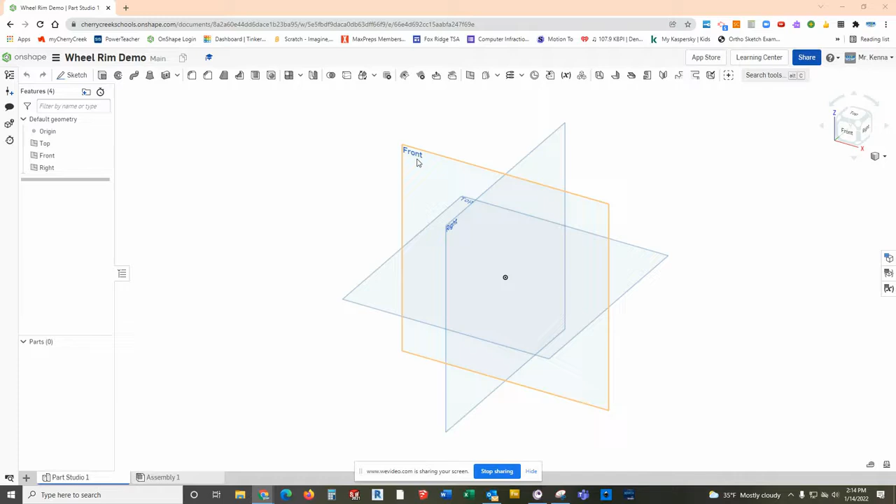So what we're going to do is start by creating a revolve so that the face of the rim faces the front view. In order to do that, we're going to draw it from the side.

I'm going to pick the right side plane, spin it over to the right side, and start a sketch. One of the first things I'm going to do is back up some, using control and the scroll mouse wheel to pan this down a little bit, because I am going to start from the origin, kind of working my way up.

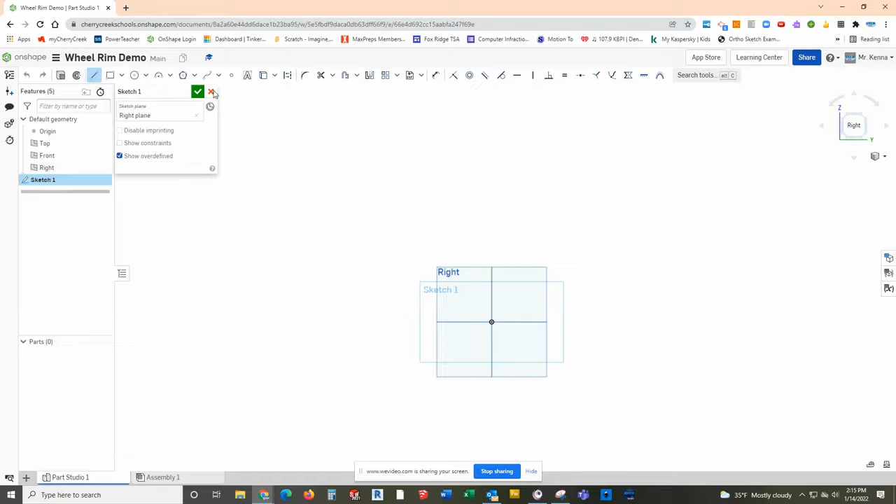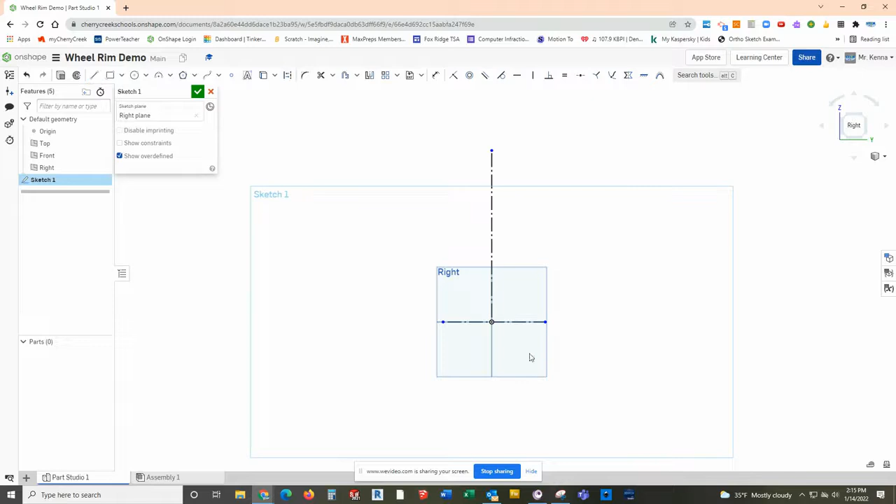The first thing I'm going to do is create two construction lines. I'll get my line tool and turn them to construction lines. The first one goes from the origin straight up, about 200 millimeters is plenty. The other one goes from the origin to the left, staying horizontal - you can see the icon telling me I'm doing that - drawing straight across through the origin, which should create a fully defined construction line. The size doesn't really matter.

You want to make sure you have plenty of space. Now we're going to draw half of the car rim shape, because what we'll end up with looks like a weird shaped Y. So we're going to draw the left half.

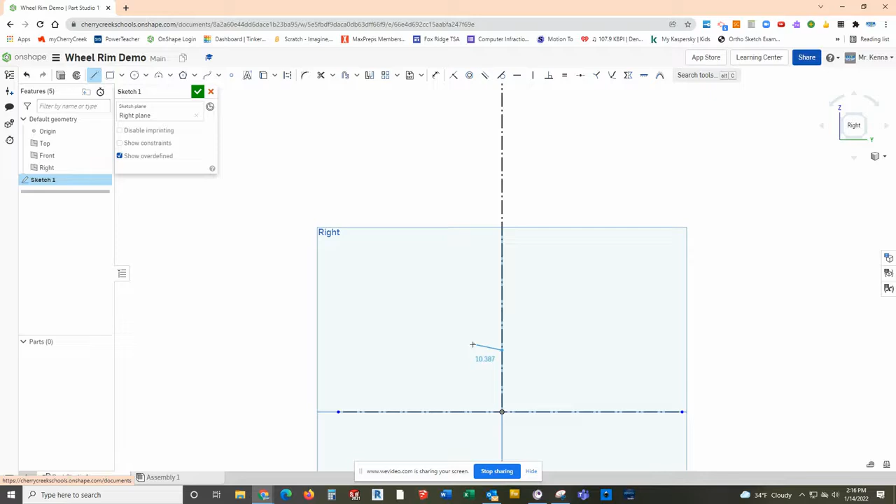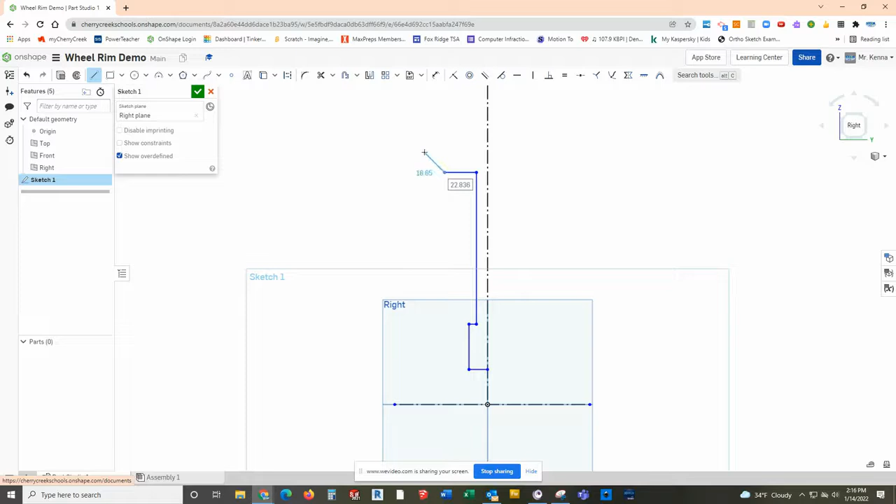I'm going to get my line tool, regular line tools, not construction, and start on the midline, the vertical center line. Somewhere in here-ish, draw straight out, straight up, back in slightly, straight up for a long period of time. I'm going to zoom out a little bit and pan up, draw it nice and long, then draw straight out, up at an angle, over.

If it adds the perpendicular, that's the one that looks like an upside down T with a box in it - that's fine. Back, and again if we add perpendicular, that's fine. I don't know about the vertical to that, so I'm going to stop a little early. Then I'll draw back to the center line, a horizontal line. So those are my lines to start with.

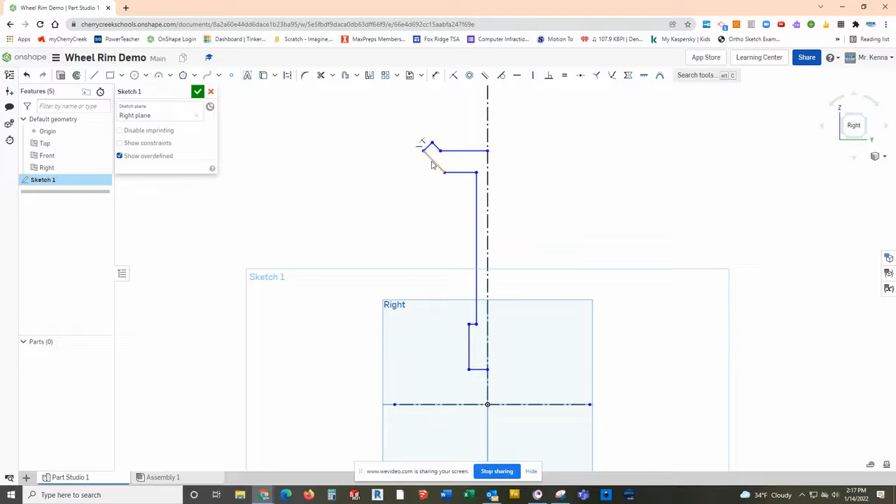I'm going to go ahead and add a relationship real quick. I'll grab this line and this line, and I want to make them parallel - not the equals one, make sure it's parallel so those stay parallel. If you didn't have the perpendiculars here, that should fix that.

These are both horizontal, so they're automatically parallel - all of that is fine. So I'm going to start adding some dimensions, starting from the bottom up. My first dimension is from here to the bottom - this is that open part of the wheel where the hub would come through. It's 30 millimeters. This is also 30.

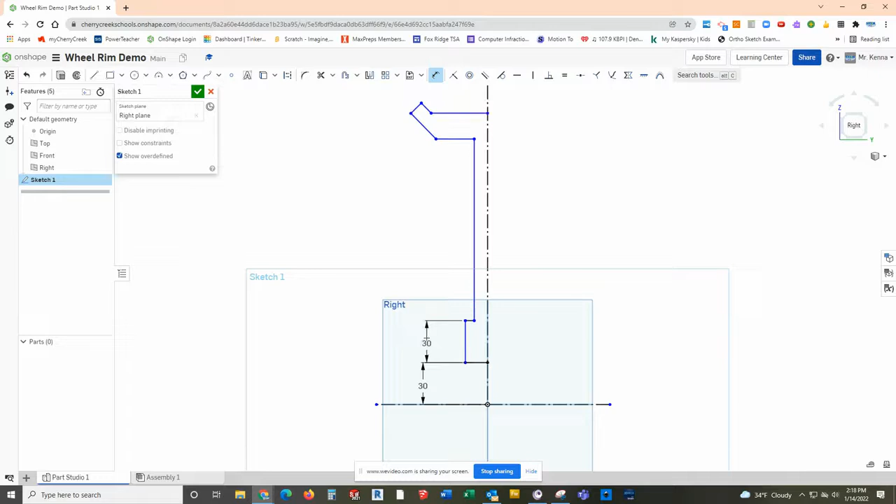We're going to go back 5 millimeters. This line is 100 millimeters. This line here is 20.

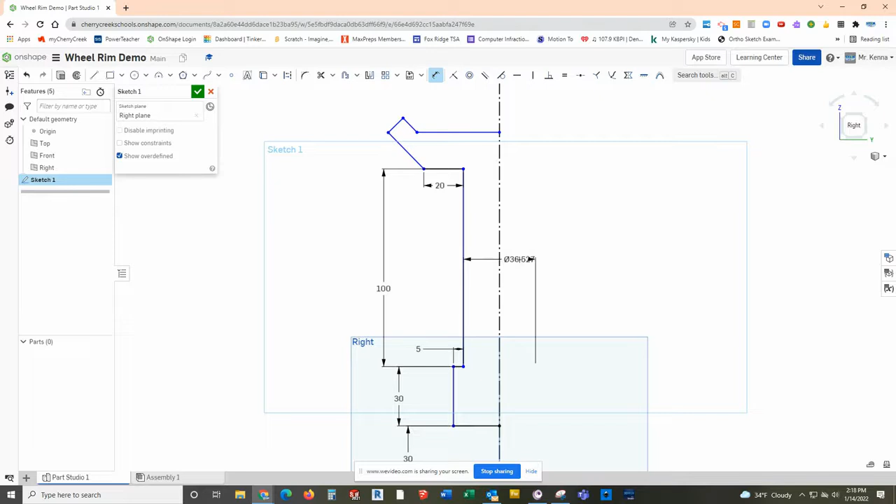And cool little trick - from this line, if I click then my center construction line, I can either tell it the distance from the construction line, or since I know I'm going to mirror that line (that's why this line is here, because I'm going to create a mirror), if I drag to the other side it'll tell me the total distance, which is what I'm going to use - this is 10 millimeters.

From here to here is 10 millimeters. From here to there, it's also 10 millimeters.

Now from this line to this line - oh sorry, I actually found out I have to do that backwards. So I want to keep this angle, and I actually know I want a 120-degree angle. So I'm going to click those two lines, because right now they're not parallel, and set them at 120.

Now I should be able to change this to 10, and it'll kind of maintain what we got going on. The last dimension is what I'm going to add that will end up disappearing, but that's okay, this line here at 25. But currently I'm all fully defined.

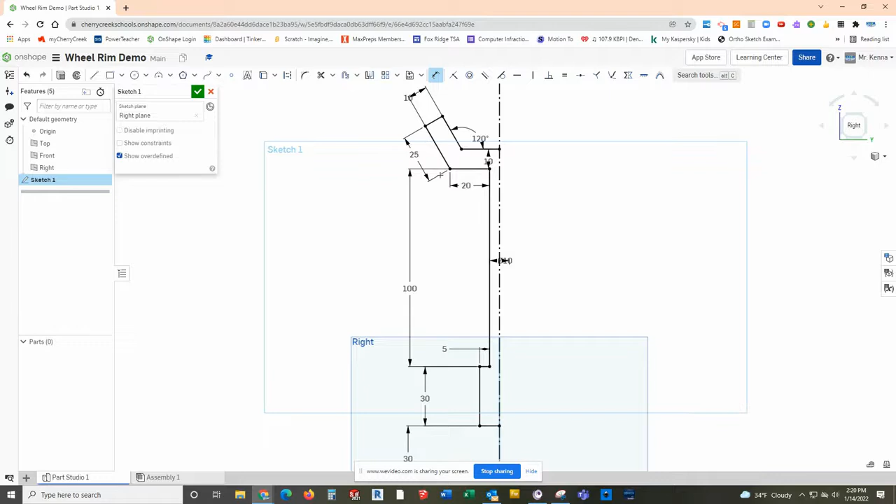Now, if you were to actually look at a rim from this distance, you would notice that this is not a square edge up here where it meets the tire. It's actually a partial circle, okay? So we are going to put that circle in and do a little splitting and trimming. You've never seen the splitting tool before, so that'll be new.

So I'm going to get a center point circle. I'm going to go to the middle of this line. I'm going to get a midpoint relationship. I'm going to bring this out, and I am going to dimension it at 15.

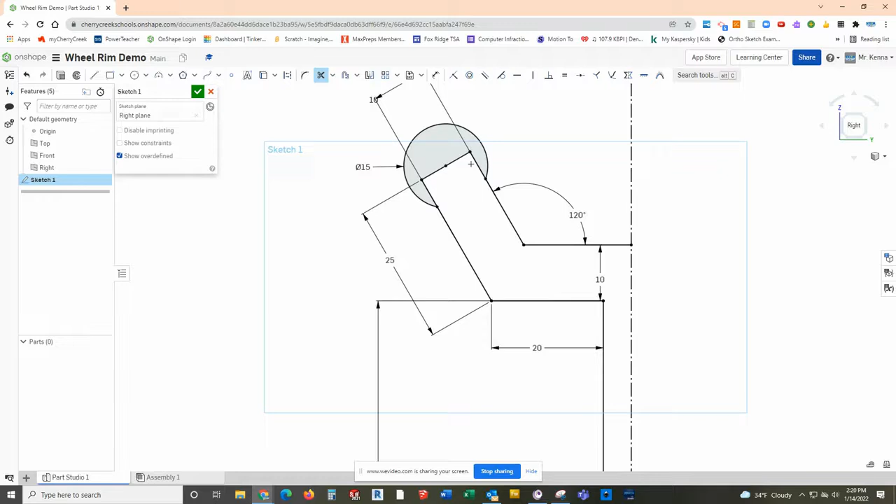Next set of steps, the order is really, really important. So the first tool I'm going to use is trim, and I am going to get rid of part of the circle. Now, if you notice, the top of this rectangular angled piece right here actually helps me locate my circle. So while I don't want these to be regular lines, I also don't want to get rid of them. I just want to turn them into something that doesn't interrupt my sketch really.

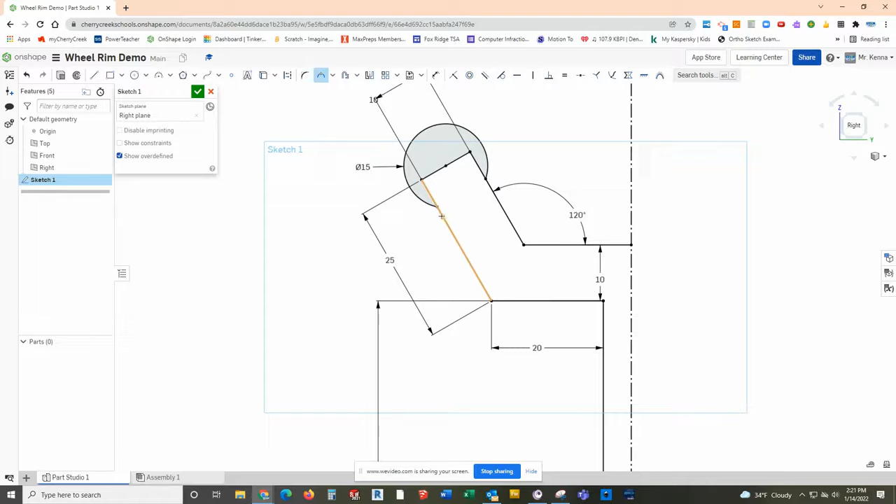So here's what I'm going to do. I'm going to actually get a different tool out that's called split. And what happens is if I go up this line and I go right to where this intersection happens and I click, it actually split my line into two lines. Got the lower line now and the upper line.

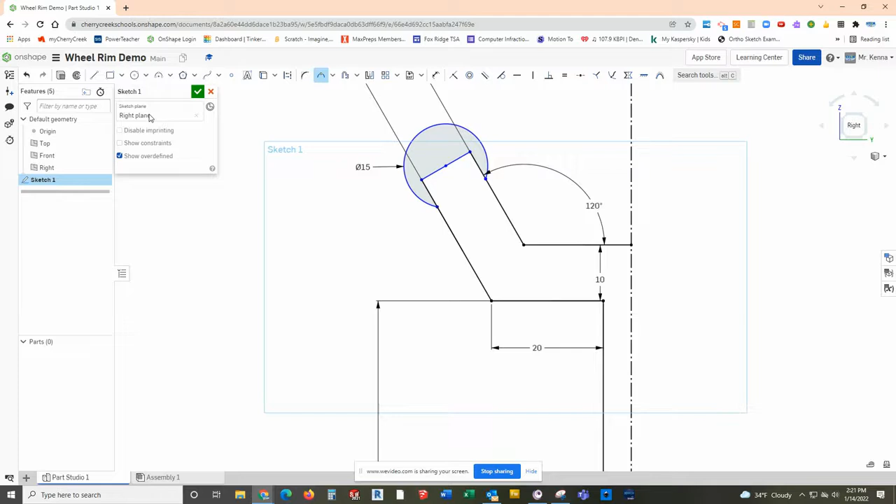I'm going to do the same thing on the other side. I'm going to come up this line to where it starts. I'm going to click to split those, and that's great. So if I get rid of this tool, you'll see I can now select this as a line or that as a line. But really what I want to select is these three lines.

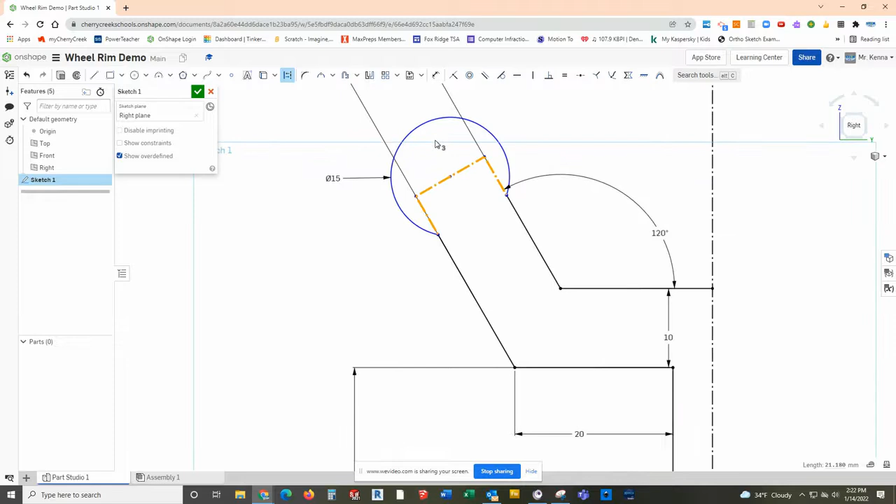So the little segment I made there, the segment I made there, and the part that connects the top. And instead of trimming them out or deleting them, I'm going to just make them construction lines. Okay, now they're still there, and they can be used for measurements and stuff. So I know it did go from being fully defined to being underdefined. The only thing I need to add is a measurement of this line right here, so everybody knows kind of where that starts and stops.

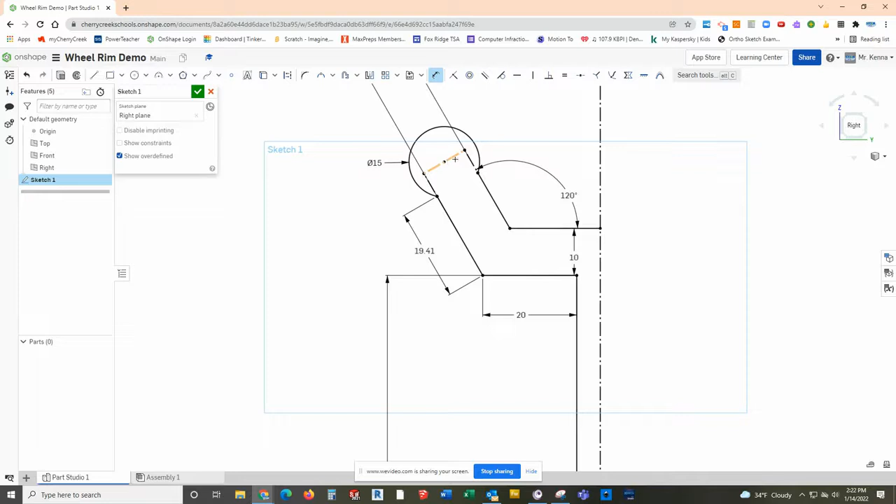You don't need to change it. It'll say 19.4 or something or other. And that's fine. We already know that from this endpoint to where this line happens in the middle, that's 20. I should have everything fully defined.

When you're going to use a mirror in a sketch, you really want to define everything that is going to be copied. That way it's fully defined when it goes to the other side. So here's a cool little trick. I think when we've seen the mirror tool before in this case, we've selected all the things, then clicked the mirror tool. One of the other ways you can do it is actually the exact reverse.

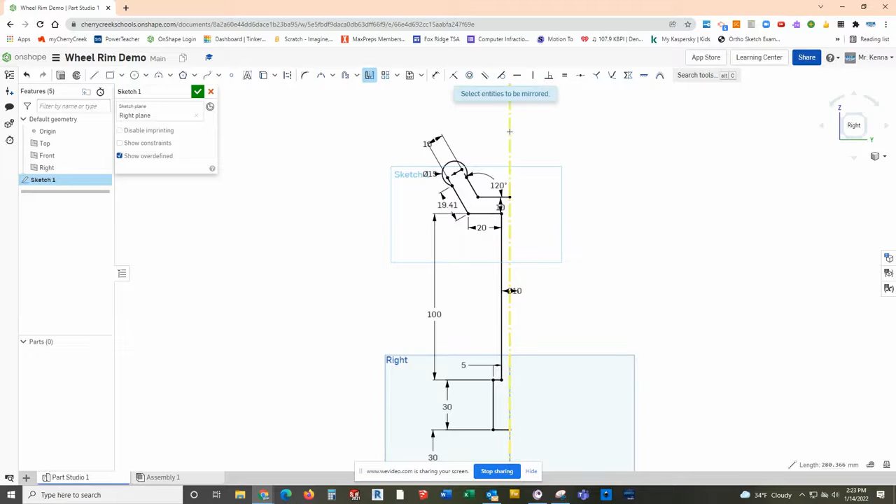So I can click the mirror tool. It'll tell me to pick a mirror line, and I'm going to grab this vertical center line right here. And now I can click on the stuff to mirror, so I can pick the exact things I need to mirror.

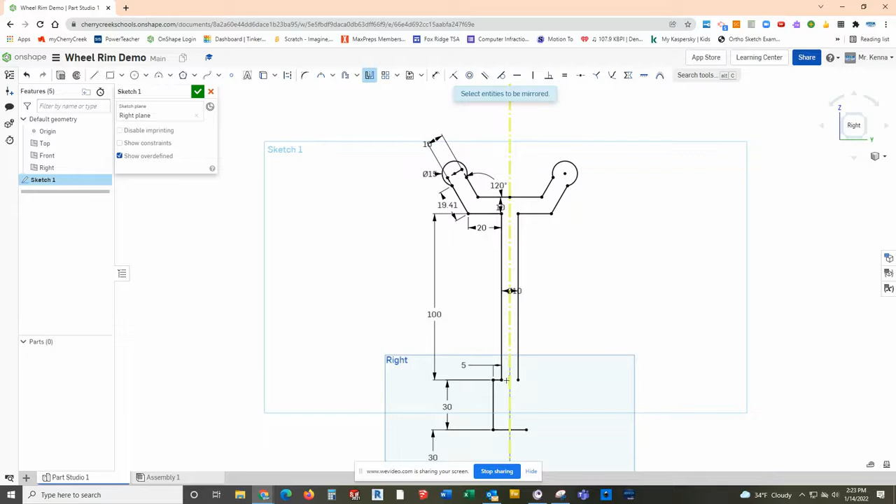So I don't need actually those construction lines there. I can mirror that, so all the lines at the top, this one here, and I'm actually only going to mirror this line right down here, okay? Because we're not going to have this hub stick out towards the outside. I'm going to go ahead and finish my mirror tool there.

The other tool that's under, so we've used trim, we've used split, now we're going to use extend. So if I click extend, I'm going to click this line, and I'm going to extend it all the way down to this line. Then what I'm going to do is I'm going to switch to trim, and I'm going to get rid of the excess.

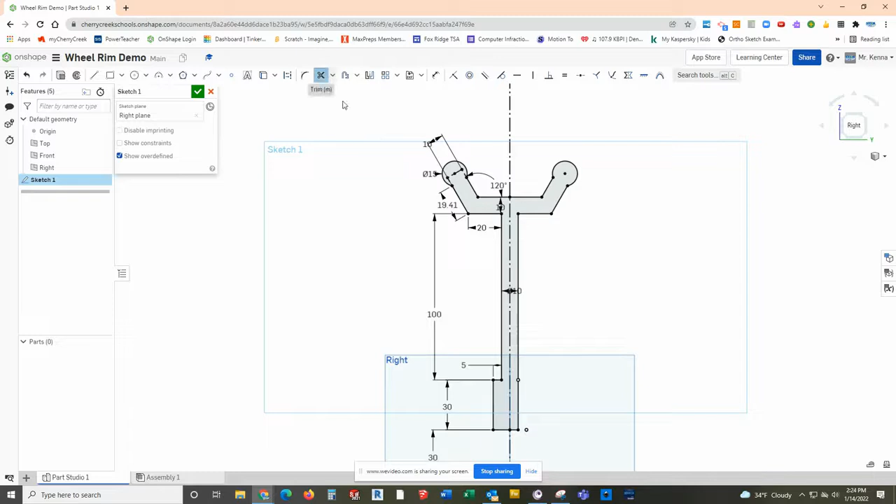Now what it seems to do is it leaves these little points, and you can see that they're hollow points. So if I click on it and I push delete, they should go away. If they don't, that's okay too. But right now I have a fully defined sketch, and this is the basis of my rim.

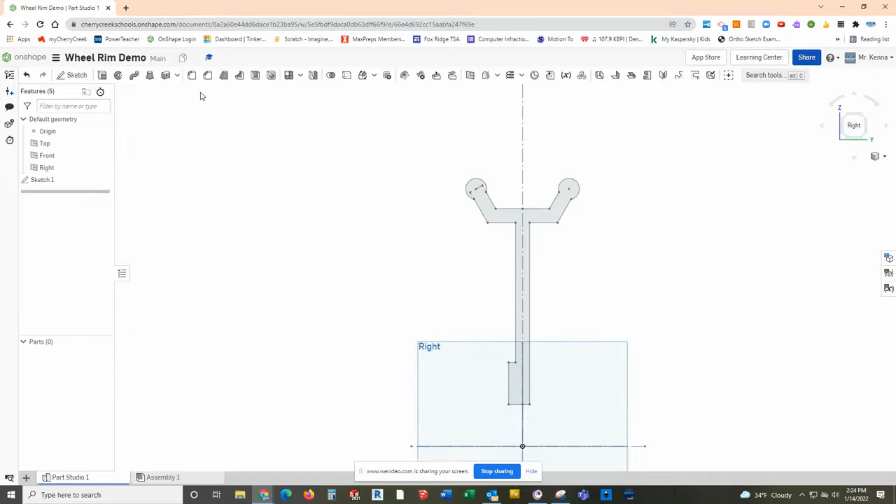So what I'm going to do now is I'm going to go back to the 3D. I'm going to accept that. Go back to my 3D view. I'm going to click revolve. The face that I want to do is sketch 1. My revolve axis is this horizontal line right here, and it's going to create a wheel.

And I'm going to go ahead and mark that as the wheel rim base. Next, we're going to cut a bunch of features into it. And there we go, now we've got it.

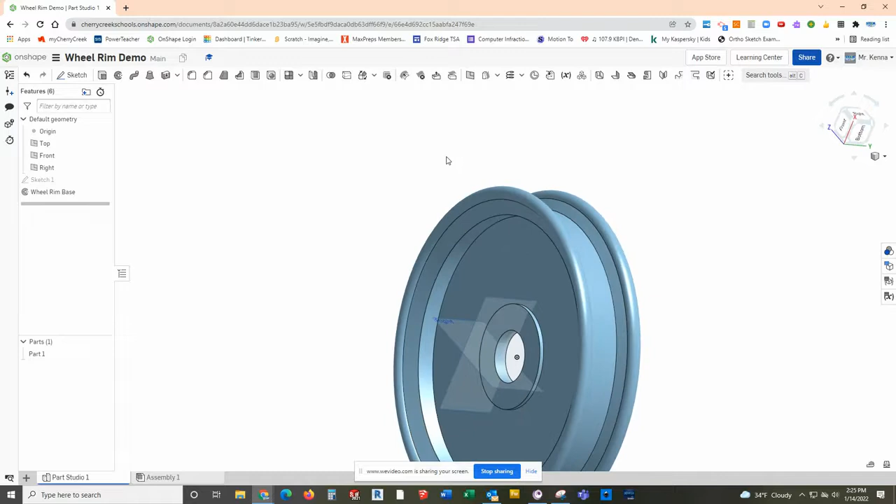Okay, if we rotate around a little bit, you can kind of see what it looks like, get the idea of, okay, yeah, it does kind of look like a wheel. If you've ever helped replace a car tire or seen a rim without a tire on it, that's what it looks like.

If you had a bike tire where you've done it too, you've seen some similar features. So that looks pretty good. It's easy to get lost weirdly on that. So that is our rim base.

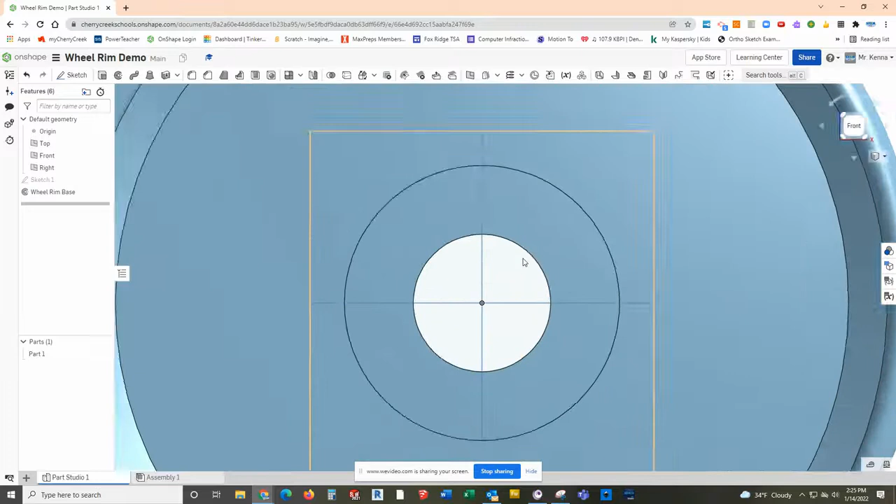The next thing we're going to do is put the holes in it that you would put the lugs through. The lugs and the lug nuts are the studs and bolts that we use to attach the wheel to the hub that rotates. So we're going to go to the front view and zoom in on this hub center section. That's where the lug holes are going to go.

We're going to click on that and start our sketch. I'm going to grab a circle, come straight vertical from the origin, and put the center of the circle there, trying to be about in the middle. Before I dimension this, I'll grab my line tool, change it to construction, and draw a construction line from the center to the origin. It's just way easier that way to dimension everything.

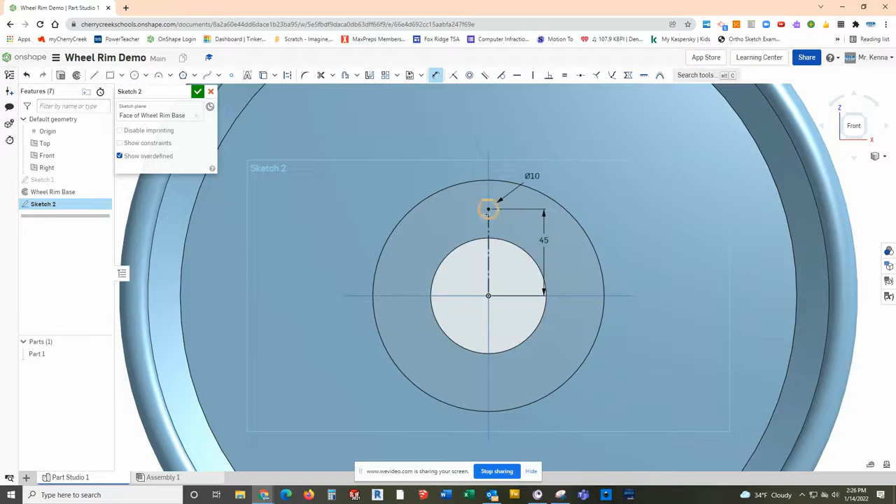The diameter of the circle becomes 10. The length of the construction line, from the center to the origin, becomes 45. Put the center of the circle halfway between the two edges of this hub plate. Pretty easy there, I'm just going to accept that.

Extrude, remove, Sketch 2 is what I want to use, and my type is through all. I'm going to click merge with all, just because sometimes that'll fix things you didn't expect to be a problem. When I click the name, this is the lug hole - the hole that the lug stud comes through. I'm going to go ahead and accept that.

So now I've got a hole. If you've ever looked at a rim, though, where those holes go in, there's a little bit of a recess, or a part cut in, that's larger than the hole itself. It's for the nut to kind of sit in there and make sure it binds to things. Kind of looks nice too. So we're going to create that lug recess.

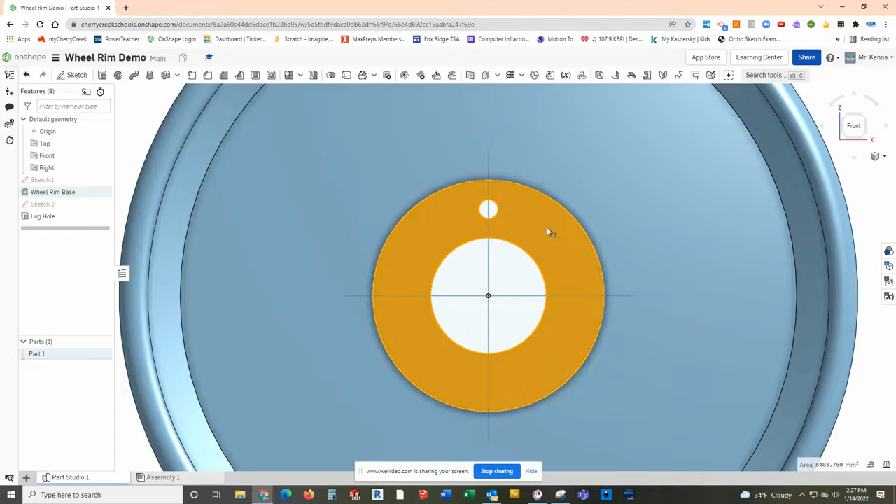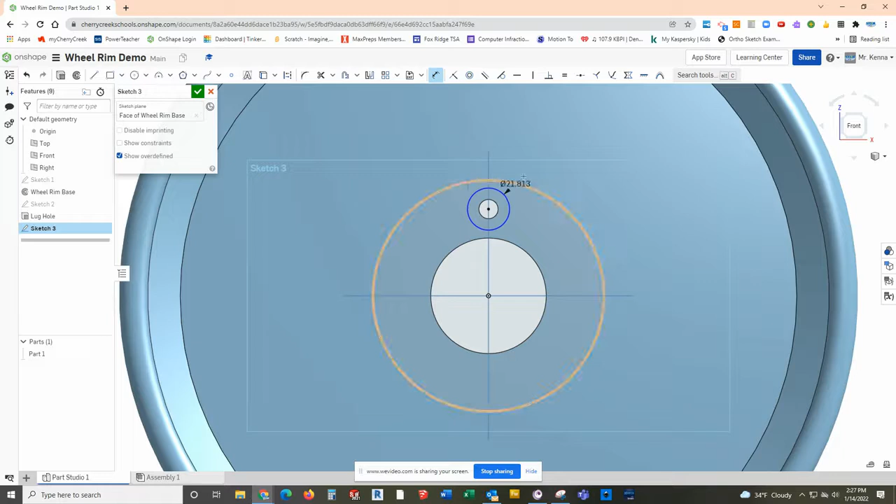Real easy - same surface, click on it, click sketch, click a circle again. The nice part is, since I already have a hole here, I can use the center of this hole to line it up. The other nice part is if I was to make a change, these two holes would move together. That's why I like doing this as a second step. And then the diameter of this is 18.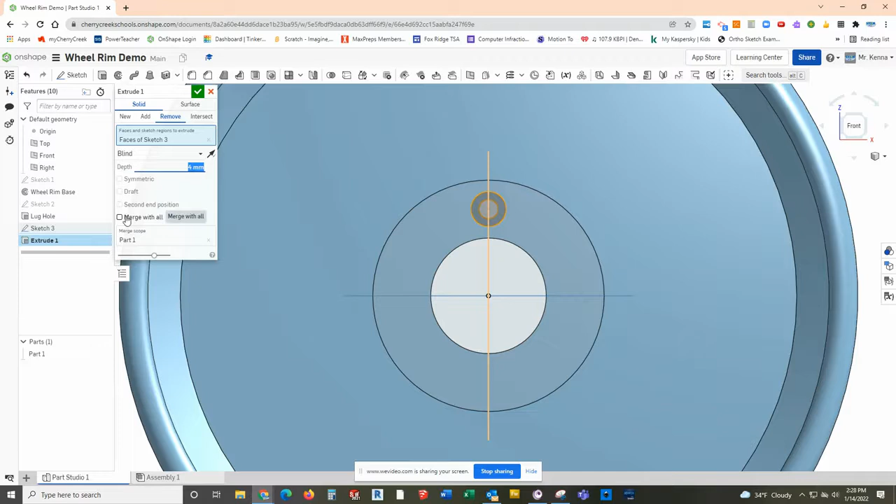I'm going to accept that. I'm then going to select it, extrude, remove. Our distance is going to be 4 millimeters. Merge with all, and we'll go ahead and accept it. If I go to look at it at an angled way, you can see it's just recessed somewhat, and then the hole goes the rest of the way through.

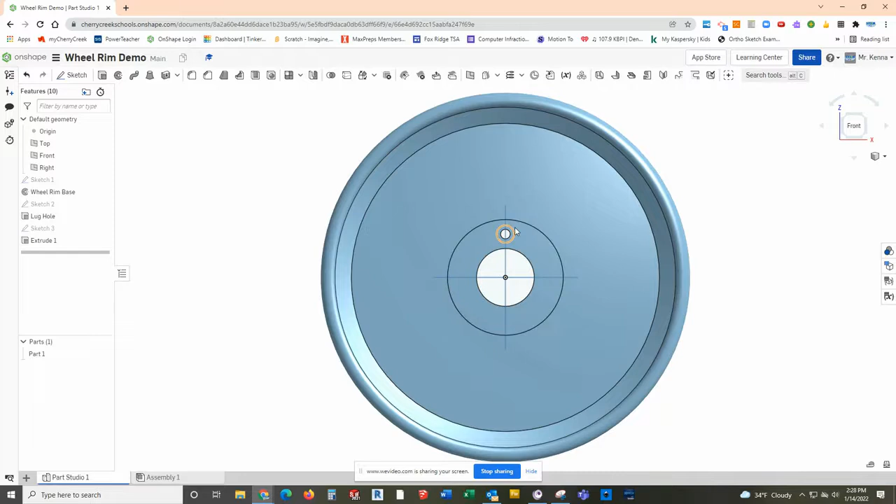Now, if I was to put 5 - you're not going to put this on with one bolt. You're going to have 5 or 6 different bolts around here, usually equally spaced in a pattern. That's exactly what we're going to create, and we're going to use a really cool tool to do that called circular pattern.

So linear pattern is here, it looks like a stack of blocks. If I drop this down, circular pattern, which kind of looks like a little simple solar system, is the one that we want to use. So here's what we're going to do.

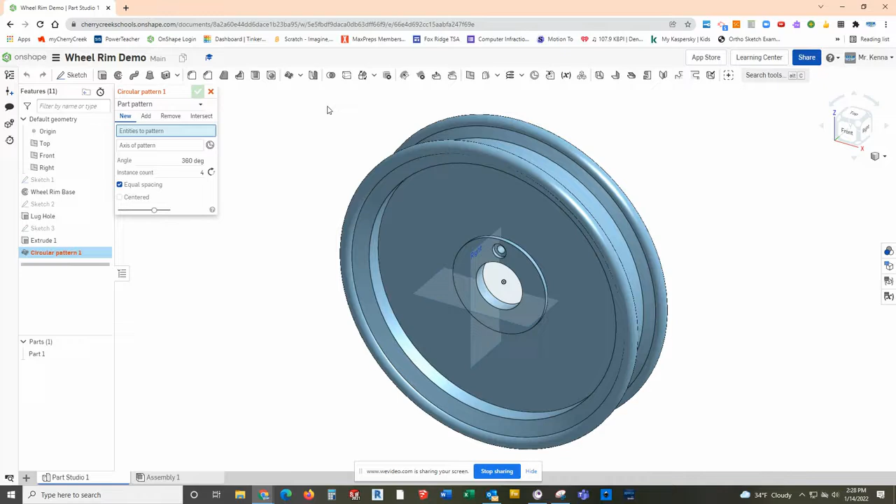First off, it wants to do it with parts. We don't really do this with parts ever - it's not a good idea unless you're using some big assembly thing. We want to do this with features. So the features that we want to pattern - excuse me, I'm going to stop real quick because I did not label my extrude and I'm going to get confused. So this was our lug recess where we recessed it back.

Now we're going to start a circular pattern and switch to features. Now the features we want are both the lug hole and the lug recess. Axis of pattern - now what we want is an axis that basically goes straight through, just like where we revolved.

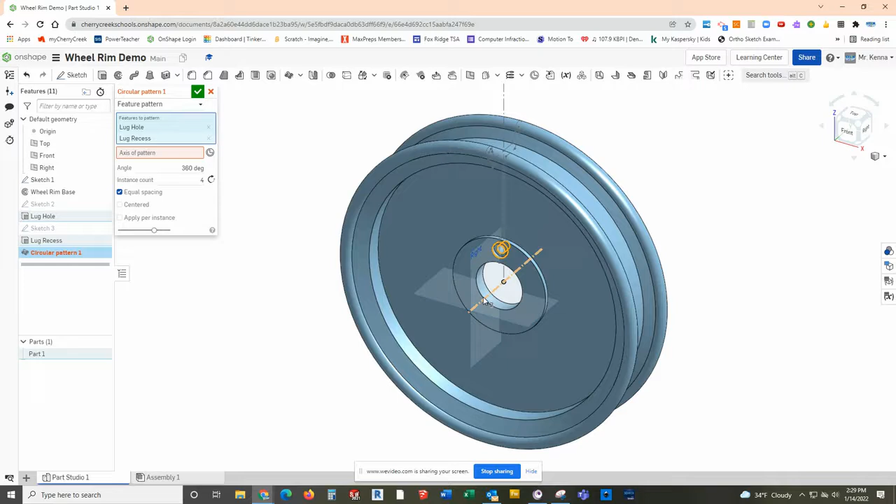So what you might need to do is go back to Sketch 1 and click the show button so that you can click on that axis right here. Okay, oh, we don't want that - we actually have to get into the axis, and now we click that.

If you notice, I now have 4 holes equally spaced. These rims will usually have 5 or 6. This is a smaller one, so we're going to go with 5.

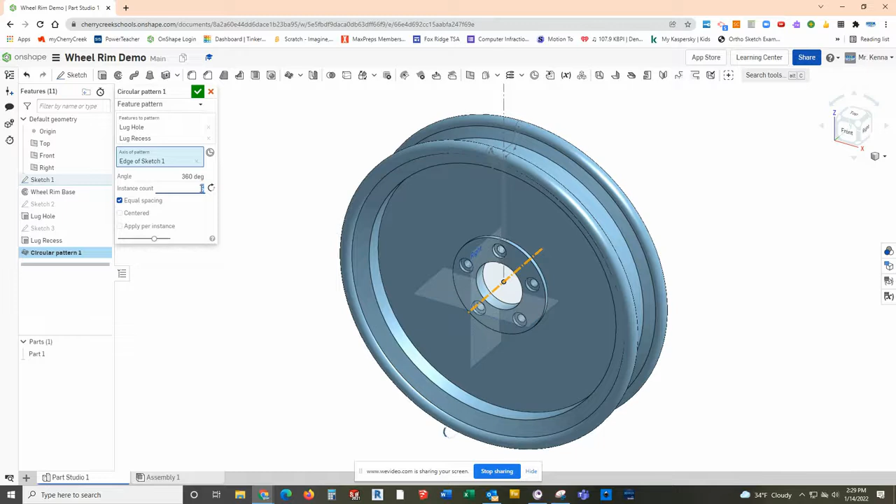And as you might imagine, if we look at it from the front and zoom in, this would have been pretty difficult having to set up lines, set up what is the actual degree measurement from here to there, put those all in, put in the recesses again. This is a way more simple way to create this when it has some sort of circular pattern. For this one, I'm going to go ahead and rename it the lug pattern.

We know that's what does our lug nuts, again equally spaced around all 360 degrees. There we go.

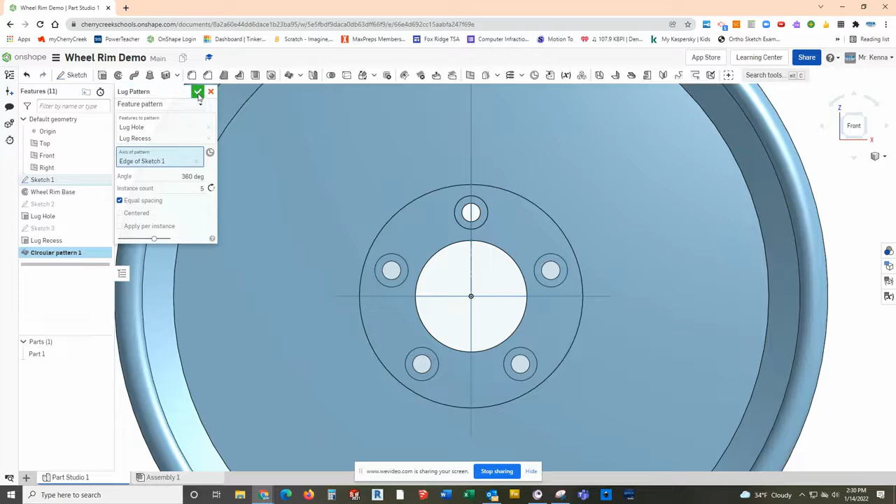So now we've got those. The next thing we want to do is this backing plate right here is solid. It would not be solid - we would have some stuff cut through this. Again, we want air to circulate around the brakes and the hub. We also want it to look cool. So this is where we're going to get into creating a shape.

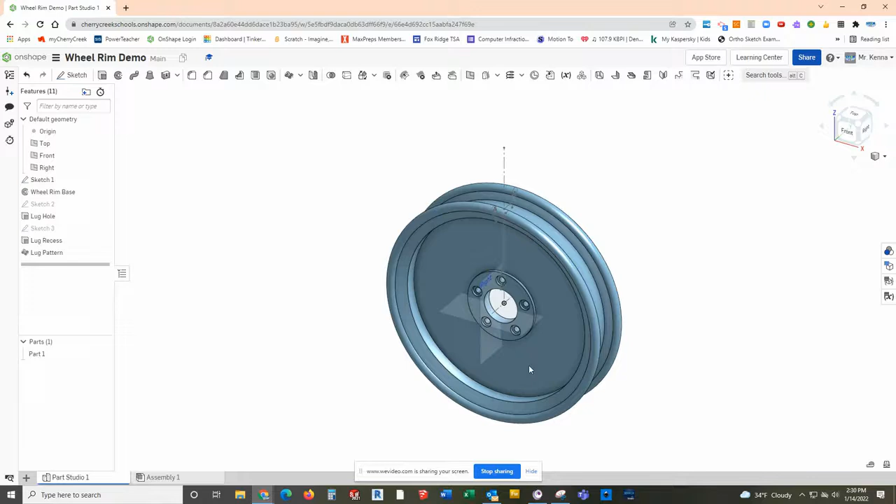So I'm going to go to the front. I'm going to click on that surface there. And I'm going to go ahead and start a sketch and zoom in so that the origin is near the bottom of the screen and I still see the angled surface here. I want to be able to see both.

So the first thing I'm going to do is get my line tool and switch to construction, and I'm going to draw a construction line from the origin all the way up to where it touches the circle. Okay, there's my construction line.

And now I'm going to draw a regular line like this - well within that surface, just kind of a slanted line. All right, that's what you're going to draw for now. We will be making some adjustments to that.

The next thing I need is to go to my arcs and get a tangent arc. I want to start from the top of this and go over to the line. I was trying to get like a 90-degree type of arc where the center of the arc was also on the construction line, but I can actually make that happen here in a few minutes with some relationship adding. So I'm going to go ahead and draw that in for now, and get the tool again and do the same thing at the bottom.

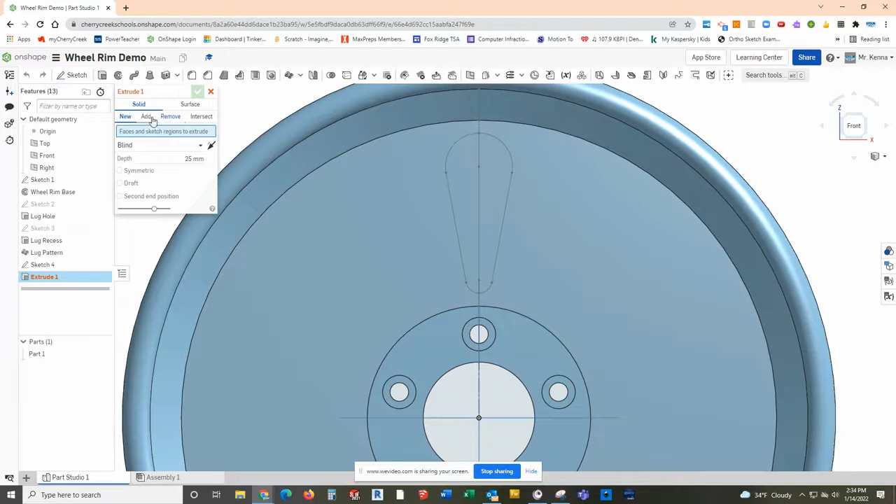Extrude, I'm going to do a remove. The sketch that I want is sketch 4. Again, we're going through all.

This one I am going to call the spoke hole. We kind of create the spoke pattern.

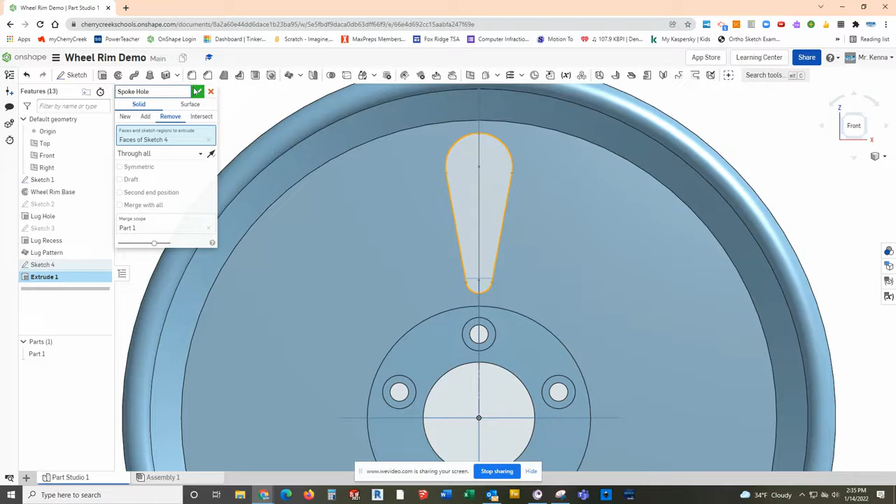And that's good. The next thing I'm going to do, I don't need a sketch because it is a chamfer. This is going to be the spoke chamfer.

I want to make sure tangent propagation - I know it's a big set of words, but make sure that is clicked. Distance should be set to 5 millimeters, equal distance, that's exactly right. I'm going to click one of the lines here, and it should chamfer the entire spoke hole. And that's exactly what I wanted.

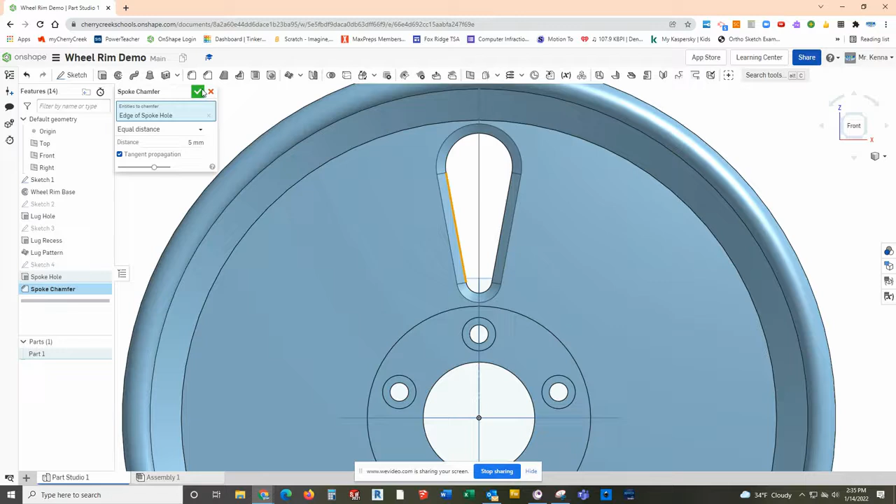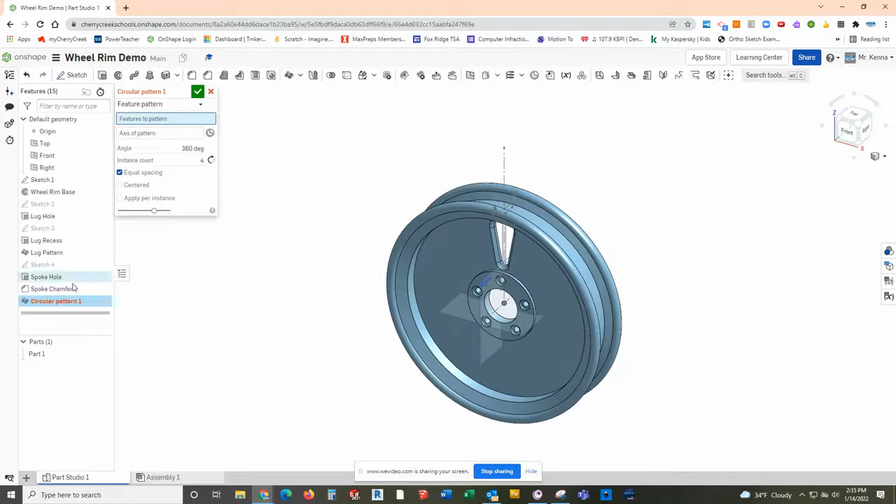The next thing, as you might imagine, is to go ahead and swing this around so we can see the whole thing to do our circular pattern. So I'm going to grab the circular pattern tool. I'm going to make sure it's feature pattern. I am going to pick the feature as both the spoke hole and the spoke chamfer. The axis is going to be that same axis that's been showing.

And this time I'm going to kick this up to, I believe 10 is what looks the best. We're going to go with 10. And this is our spoke pattern.

That gets us our spoke holes, and now we're starting to really look like the rim of a car. The last thing we're going to do is use our fillet tools to round some stuff over before we apply material and all that.

Now I am done using sketch 1, so I'm going to go ahead and shut that off. Next I have about 3 fillets that I'm going to add to different parts of my rim. I think the planes are kind of obviously in the way, so I'm just going to close those real quick.

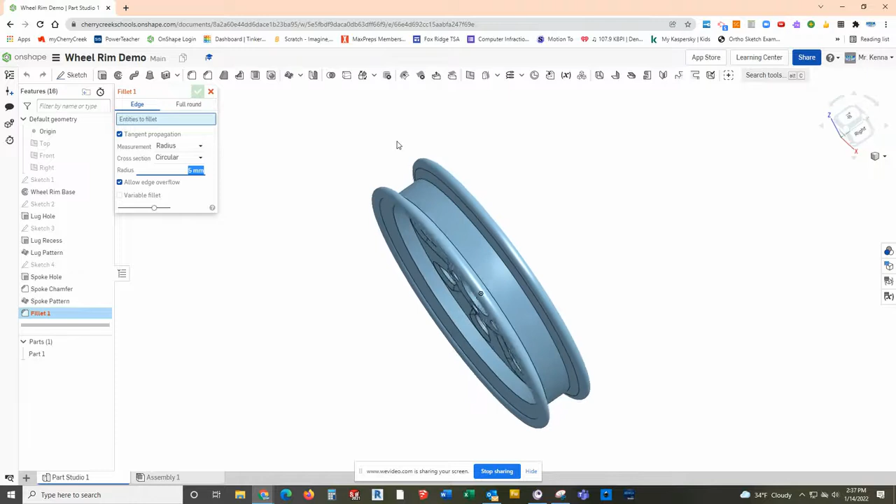The first fillet I'm going to set up, I'm going to pick fillet and leave it as 5 millimeters. I'm going to look where the tire goes. If you see this surface right here where the tire goes, I'm going to click that surface, which will put a 5 millimeter fillet on both sides of it where it meets it starting to come up. Okay, that would be a fillet like that.

If you had a square corner like that in aluminum, which is likely what this is made out of, you would actually have a part where it would break off. So we're going to round that to make it stronger. In this case I'm not going to label them as a certain feature, but this is a 5 millimeter fillet. So fillet 5mm, leave that.

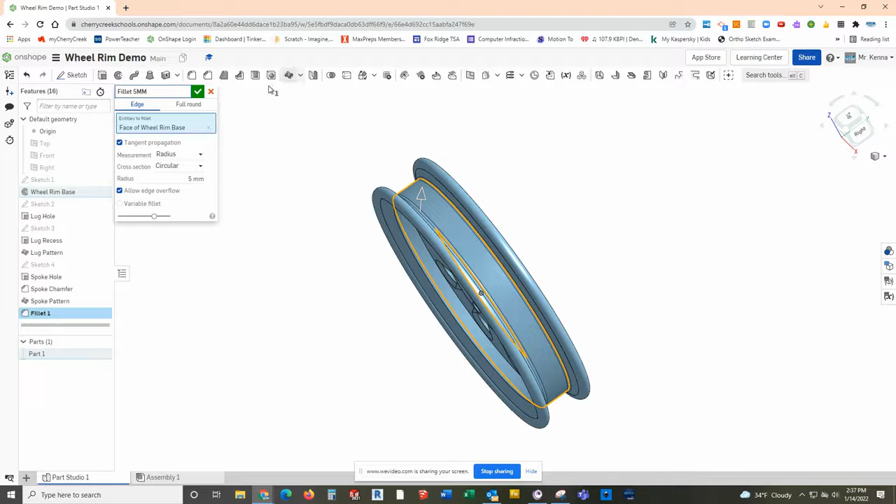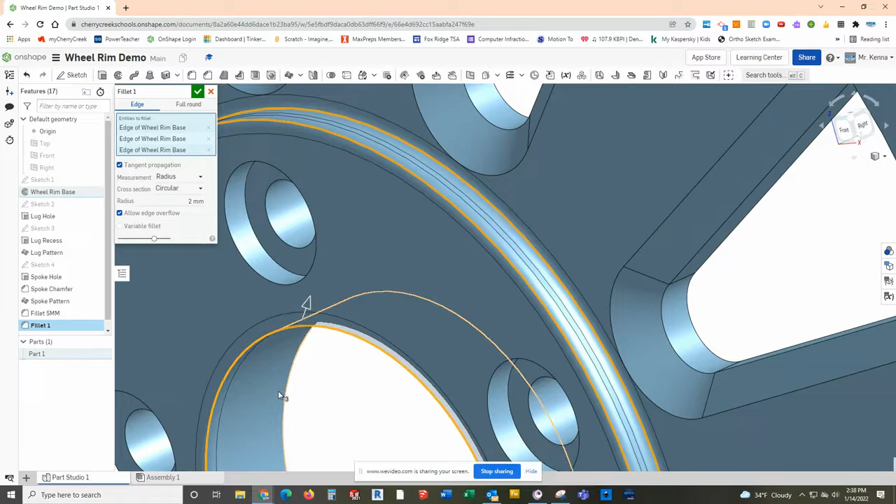My next one is a smaller one to break over some of these straight corners. I'm going to pick fillet and change it to 2 millimeters. There's a lot I'm going to click on. As I come down here, I'm going to click on this edge, that edge, and this inner edge right here, that outer edge right there. I could have just clicked that surface, but in this case I grabbed both of those.

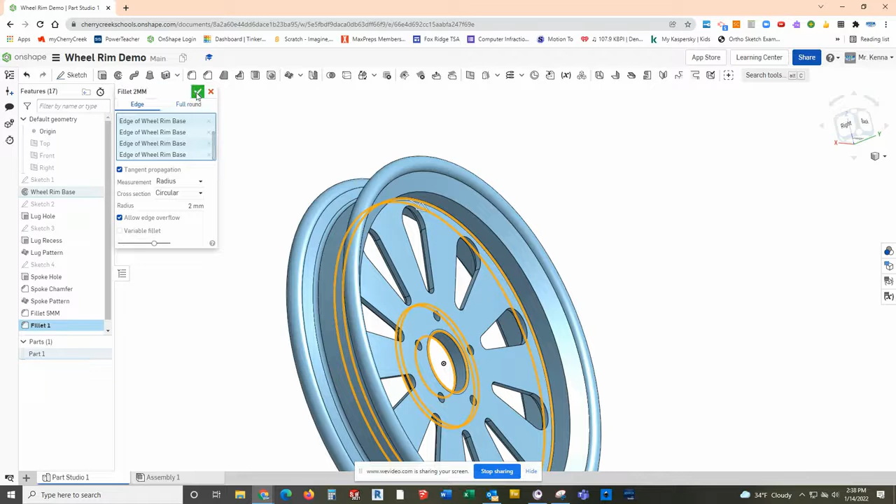I'm also going to grab this edge right here, and I'm going to use my arrow keys to swing around and grab that same edge on the other side. Again, I'm going to label this as fillet 2mm, and accept.

The last one I am going to do on 2 surfaces that I'm going to have to go front to back. So you have this hard corner right here. It would not be a hard corner like that - that would be much more of a smooth transition. So we're going to go ahead and put that in.

I hope everybody sees that we're doing this at the end after we've made all those features, because we use some of these edges to measure different features from, which would have been harder if we filleted them earlier. That's why we're doing this at the end.

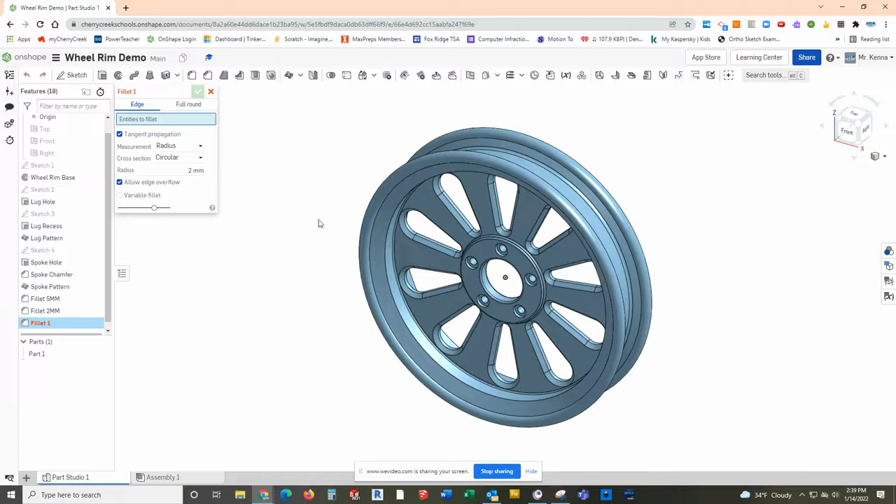So the 2 entities I want are this edge right here and this edge right here, where that Y kind of poked out. This one is a 20mm fillet - we really want to round those edges. So again, we're going to go ahead and label the name 20mm, just those two edges.

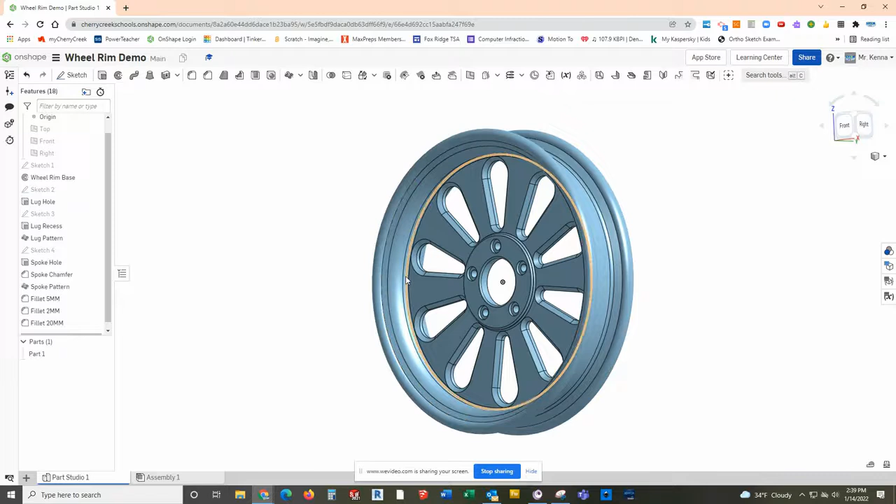So like I said, now we've got a fairly smooth transition across. We've got a nice shape to it, a very realistic shape to it. I'm going to go ahead and go back to my 3D view, hold Control and scoot it over a little bit because now it's time to get it ready for the screenshot.

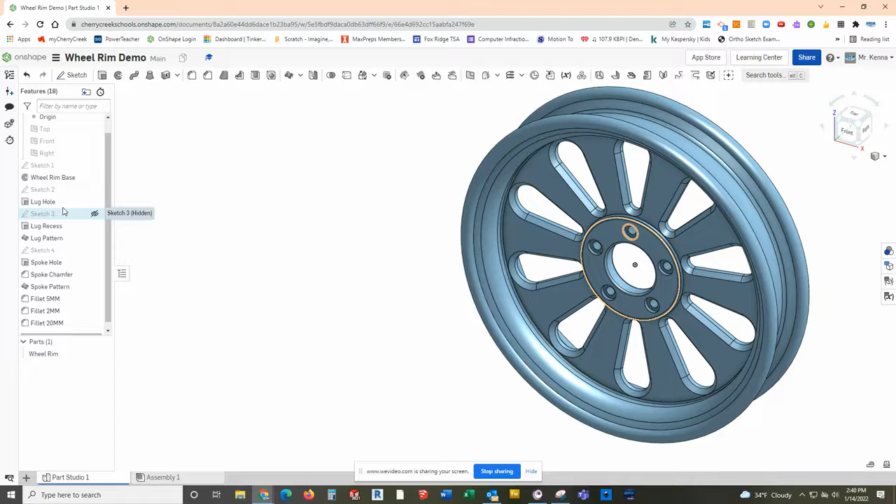I'm going to go ahead and label my part 1, rename that wheel rim. As you know, we probably wouldn't just have this - we might be designing a whole car that we're going to then put 4 of these wheel rims on.

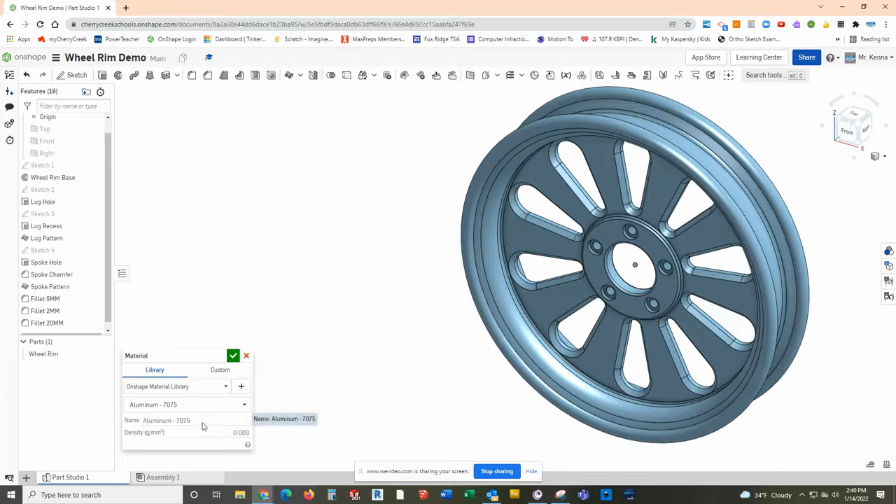I am going to go to Assign Material. What I want to do is where it says none, I'm going to start typing aluminum. If you get ALUM in, you can probably start to scroll, and you can see there's many different types of aluminum, and the aluminum that you're looking for is 7075. This is a specific mixture of aluminum and some other things. So we'll accept that.

I don't like that this is blue, so I'm going to go to Edit Appearance and pick that nice silvery gray color. Doesn't matter because in my screenshot it's going to be orange anyway. When you highlight it and click Mass Properties, that's what should be showing, and you've got your number here in grams. There's your screenshot that you're going to take to turn in, and congratulations on making a realistic looking tire rim that would go on a car.